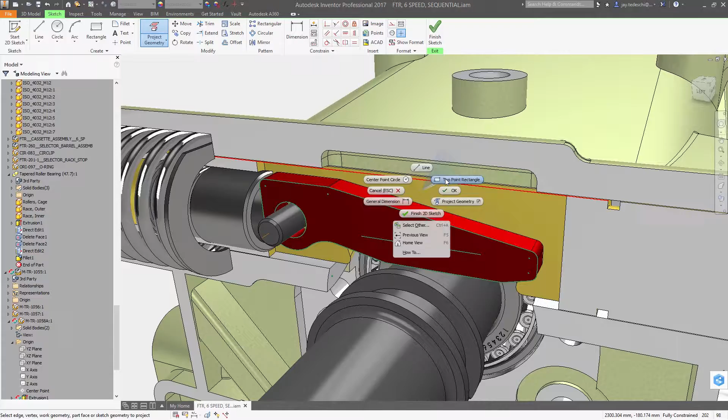With Autodesk Inventor 2017, core design tools for part and assembly modeling, surfacing, sheet metal, and drawings include several enhancements that make it faster and easier to design and document your product.

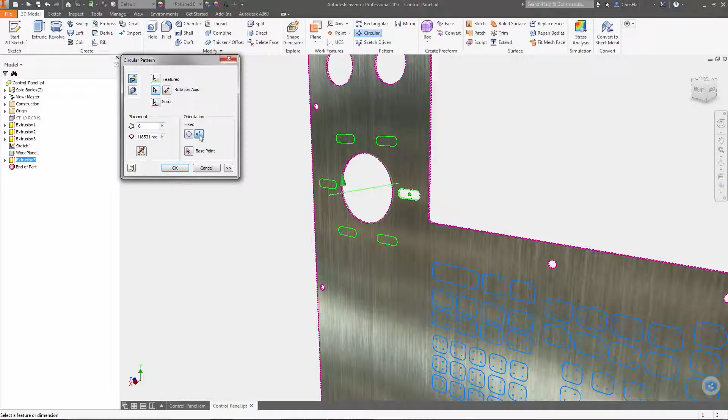In the part modeling environment, you can now window cross-select multiple closed profiles at once when using the extrude command. There are several enhancements to patterning as well. Circular patterns have an option to fix the orientation of the feature as it rotates around the axis. A new sketch-driven pattern tool lets you pattern features to points created in a 2D or 3D sketch. And patterning and mirroring operations can now be applied to multiple bodies at once.

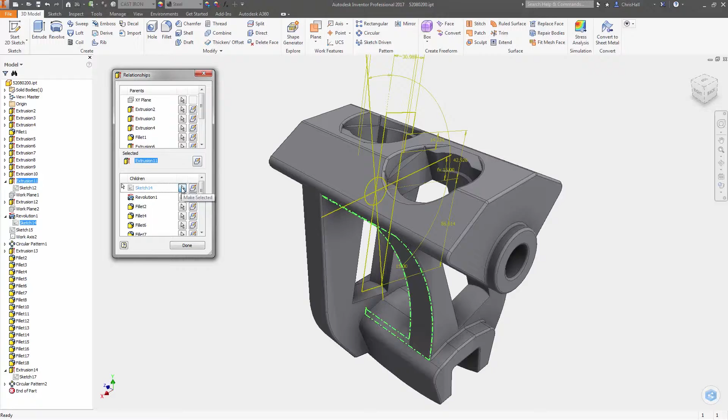There's also a new Parent-Child Relationships browser that can be accessed by right-clicking on the feature in the window or in the model browser, so you can see the upstream and downstream dependencies for each feature.

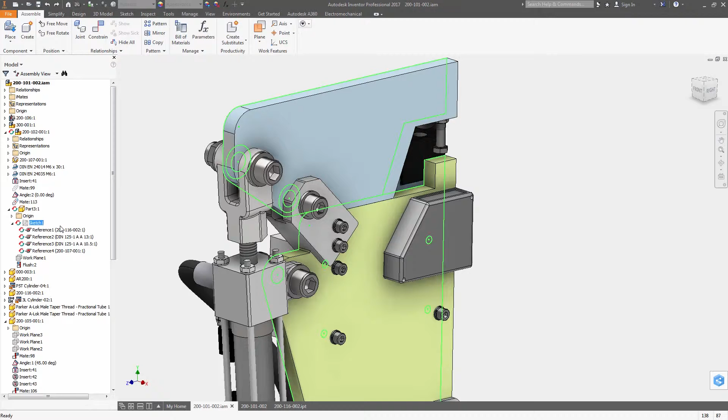When designing assemblies, you can now make components transparent by right-clicking on the object and selecting Transparent from the pop-up menu. Cross-part references are easier to identify, with component names displaying next to the reference feature in the model browser, along with icons that illustrate the type of reference. There's also options to break the reference, open the assembly file the reference was created in, or open the reference part directly. We've also made enhancements that give you more control over the creation of surfaces.

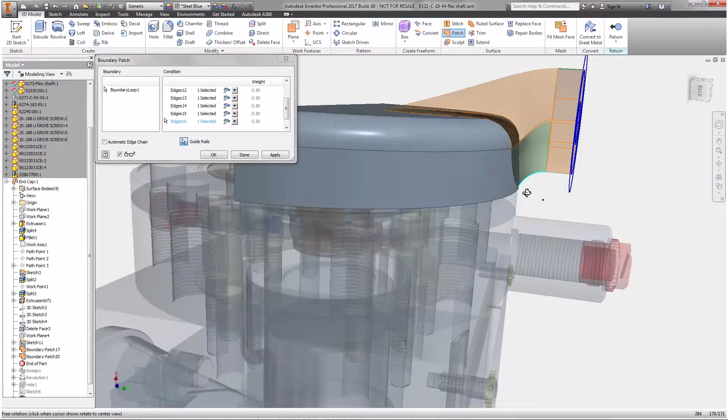You can now select guide rails when using the boundary patch command, to select curves or points that guide the shape of the patch. And an angle option has been added for all types of ruled surfaces.

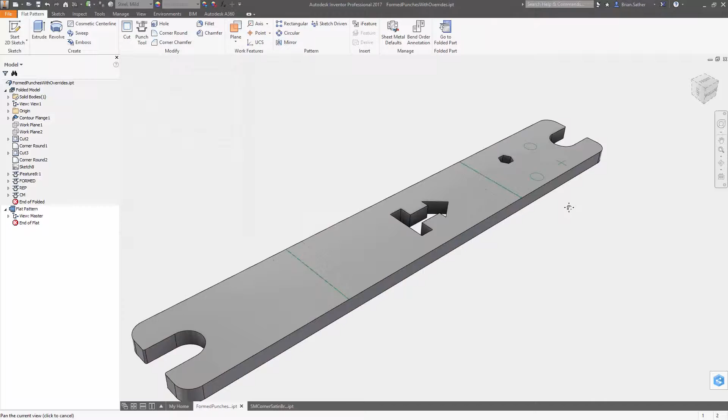Inside the sheet metal environment, there are three new corner relief options to give you more control over the placement. You can now also control the visibility of punch representations on the model, so the punch can be shown, or a sketch representation or a center mark can be used. And there's now an option to defer flat pattern updates.

Drawings have also been enhanced with a new option to use a jagged line to display cut edges for partially sectioned components in a section or detail view. Column and table header rows now support text wrapping, and parts can be opened directly from parts lists in the drawing.

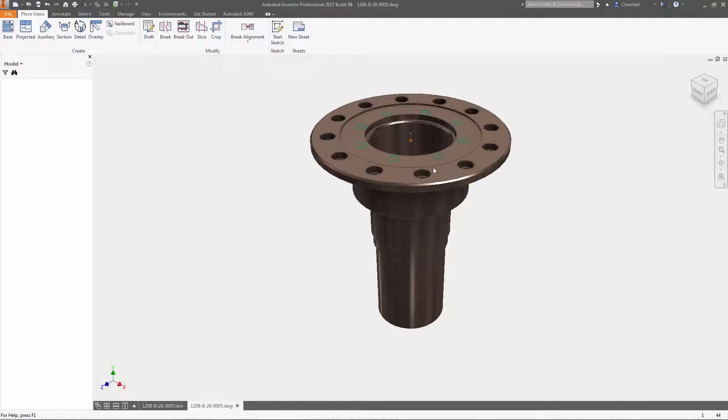From part and assembly modeling to surfacing, sheet metal, drawings, and more, the core modeling tools inside Inventor 2017 are better than ever and help you quickly create your product designs and documentation.